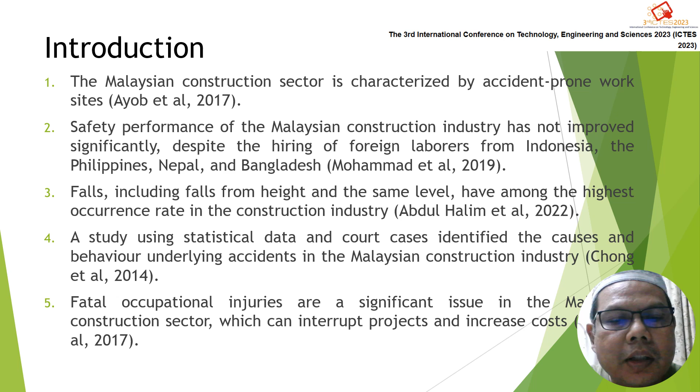industry, Abdul Halim 2022. A study using statistical data and court cases identified the causes and behaviors underlying accidents in the Malaysian construction industry, Chong 2014, and fatal occupational injuries are significant issues in the Malaysian construction sector which can interrupt projects and increase costs.

Problem statement. Regulatory measures, for example, the Occupational Safety and Health Act 1994, OSHA 1994, the Construction Industry Development Board CIDB Act 1994, and so on, although they have had a significant positive impact, challenges still exist due to the size of the construction industry and limited resources of regulatory bodies. Some companies may prioritize cost-cutting over safety, leading to non-compliance.

Raising awareness and changing attitudes towards safety amongst workers and employers remains an ongoing process. Modifying behavior to encourage safe behavior is a key element of a good safety program, Ismail 2012. Focusing on safety violations will give valuable insight into behavior among construction practitioners, thus allowing for more effective safety programs.

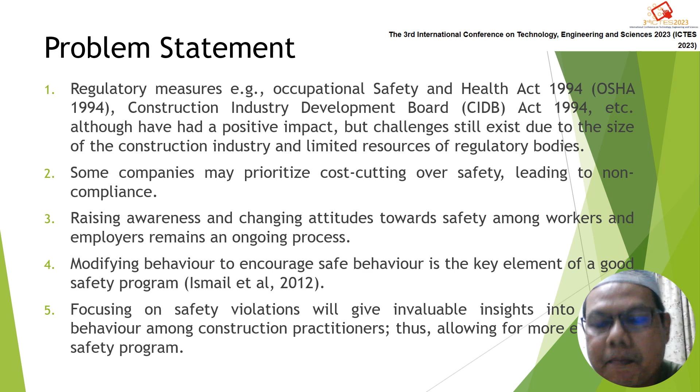Objectives of this study: to investigate the severity of safety rule violations in terms of potential hazard and proportional responses, their frequency, and also the perpetrators of the safety violations. To analyze and rank the severity of safety rule violations, the frequency, and the perpetrators.

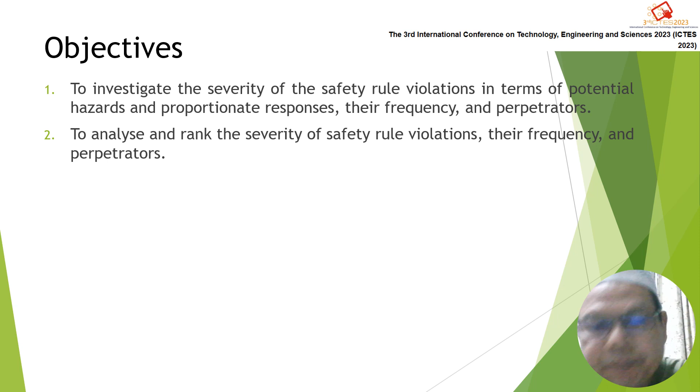Methodology. First, a literature review, from which a questionnaire has been prepared, divided into 5 sections. Section A, respondent's organization. B, respondent. C, severity of safety violations. D, frequency of safety violations. And E, perpetrators of safety violations, and also the gap of the research.

Next, data collection. Technique: online questionnaire distribution, and samples are gathered from construction stakeholders involving contractors, developers, consultants, and also the authorities. Data analysis technique: descriptive analysis, i.e., mean, standard deviation, and variance. And the tool used is SPSS version 26. And conclusion: rank of the severities, frequency, and perpetrators of safety violations.

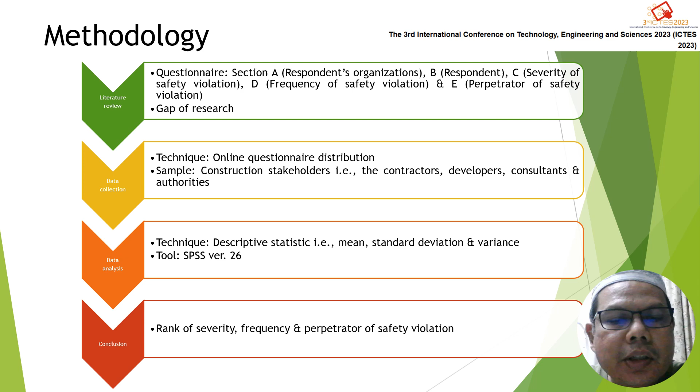The results. On the first issue investigated, which is the severity of safety rule violations, it was found from the responses that lack of fire protection, ladder safety, chemical inventory and care in handling, and also lack of risk, near miss and accident reporting, lack of proper electrical wiring, and lack of scaffold safety are among those giving the most severe consequences if the violation should progress into actual accidents or incidents.

Whereas lack of building material inventory and care in handling, lack of care in performing site clearance and walkthrough, lack of powered industrial truck safety, for example forklifts, and lack of elevated storage surfaces safety have been deemed not to cause as severe consequences upon the occurrence of accidents.

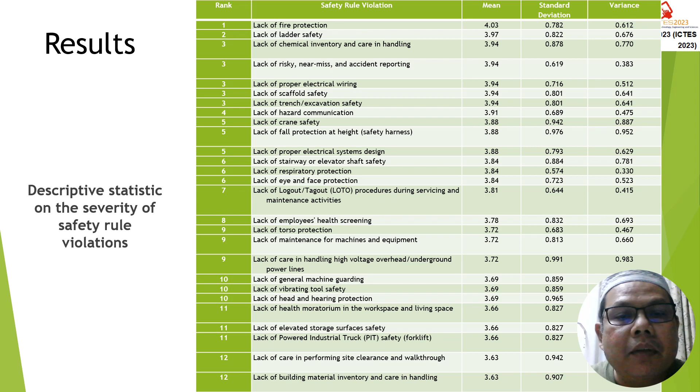Next, with respect to frequency, lack of risk, near miss and accident reporting, lack of lockout tagout procedures during servicing and maintenance activities, lack of eye and face protection, lack of employee health screenings, lack of health monitoring in the workplace and living space, and lack of order and hygiene in workspace and living space are considered the most frequent violations, whereas lack of proper electrical wiring, lack of care in performing site clearance and walkthrough, lack of chemical inventory and care in handling, and lack of fire protection are considered less frequent by the respondents.

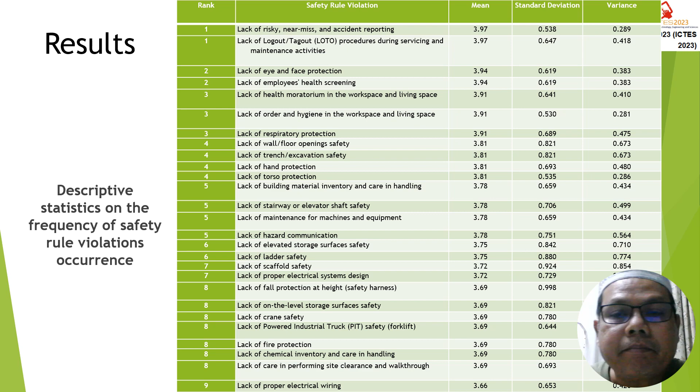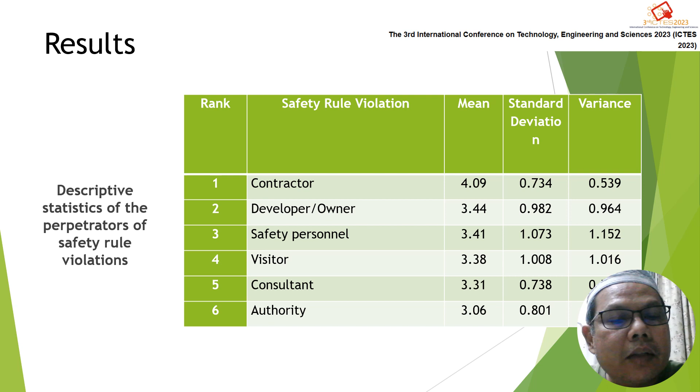In terms of perpetrators, contractors, which make up the majority of the members at the site, are considered to contribute the most to safety violations as compared to, for example, developers, safety personnel, visitors, consultants, and authorities, which have been deemed least likely to have committed violations.

In conclusion, the most severe safety rule violations in terms of risk hazard and proportional responses were lack of fire protection, ladder safety, and chemical inventory and care in handling. The most frequent safety violations were the lack of risk, near miss and accident reporting, lack of lockout or tagout procedures during servicing and maintenance activity, the lack of eye and face protection, the lack of employee health screening, the lack of health monitoring in the workspace and living space, the lack of order and hygiene in the workspace and living space, and the lack of respiratory protection.

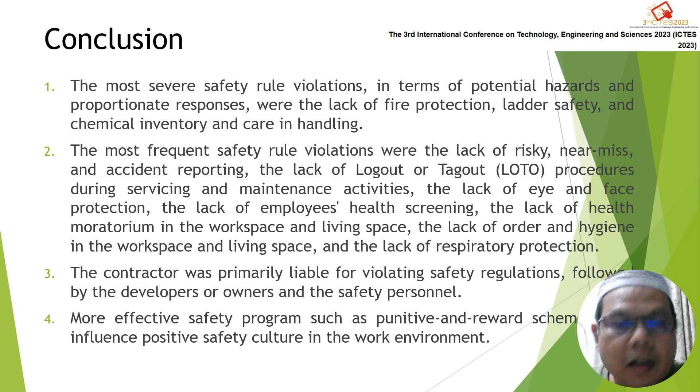The contractor was primarily liable for violating safety regulations, followed by developers or owners and the safety personnel. More effective safety programs such as punitive and reward schemes may influence a positive safety culture in the work environment. These are some of the references used in this study.